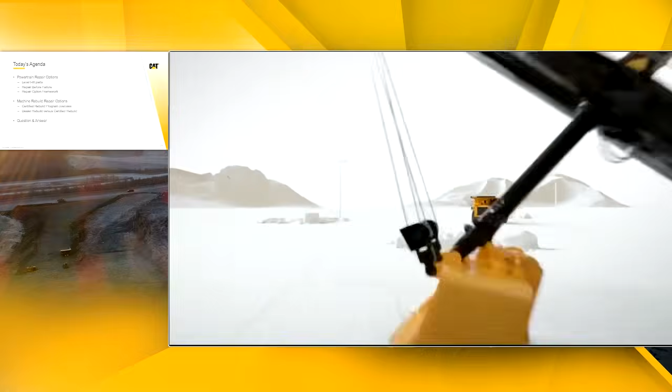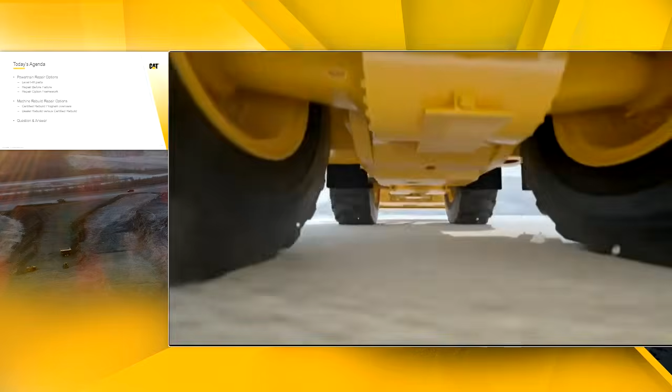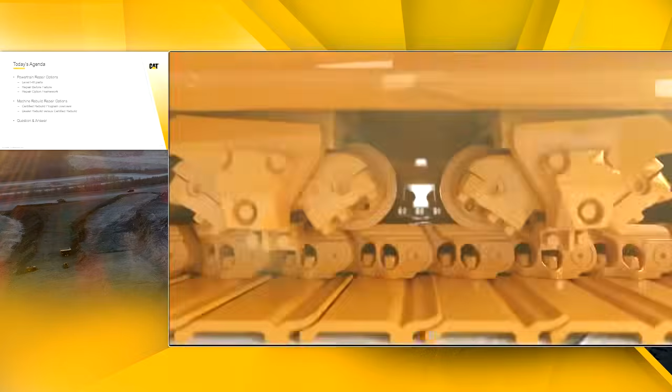You choose Cat equipment to get the best for your operation. That's why it's critical to protect that investment by performing the needed repairs on schedule and before failure. Whether critical components like engine, drivetrain, and hydraulics, or a full machine rebuild, you can count on Caterpillar for the lowest total cost and the quickest turnaround time, maximizing uptime. After all, who better to trust for repairs than the OEM that designed components specifically to be rebuilt? Your Cat dealer offers the broadest range of options tailored to your needs, from quick time to quote, to tiered price offerings, to quality and reliability. You get their expert advice for the best solution, whether minor repairs, dealer exchange, Cat reman, or new. Plus, check out upgrades and enhancements for added comfort, safety, and performance. So you get tiered options, less downtime, and superior components for your machine's second life. That's sustainability, and it all starts with your Cat dealer. Ask about custom repair options and rebuilds today.

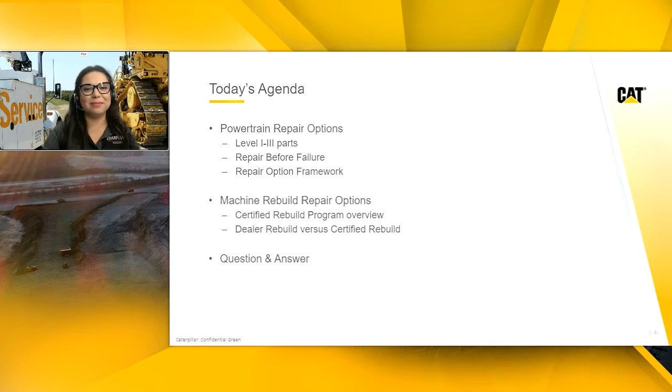I will turn things over to Lina now to give us an introduction to powertrain repair options. Lina, how are you today?

Hi, thank you so much. Good morning, everybody. Thank you for making the time today to attend this repair options for Cat mining machines session. My name is Lina Ahmed. I'm the RO SME for EAME and CIS region. I'm part of the global repair option team.

Let me stop you very quickly. Your audio is sounding just a little bit odd. Let's check that audio very quickly. Let's have you try one more time. Can you hear me clear now? No, I'm hearing some distortion on your end.

Distortion, just a little bit of distortion. How about we get you to maybe adjust your mic, turn it on and turn it back off for just a second. And while you're doing that, I'll go ahead and guide the audience over to a poll.

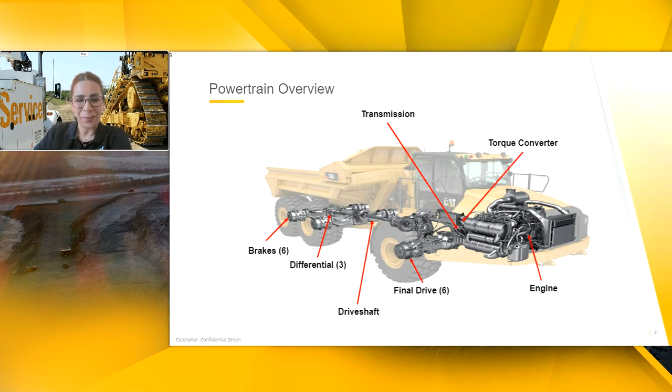Just want to remind you, if you have any question, just kindly throw it in the Q&A box. You can freely ask us and we'll take those after the session.

Give you a couple of minutes so you can complete the task. Thank you so much.

All right, let's go and find out the results. Repair before failure, I like that. That's a good indicator. So thank you for making the choices. Appreciate that.

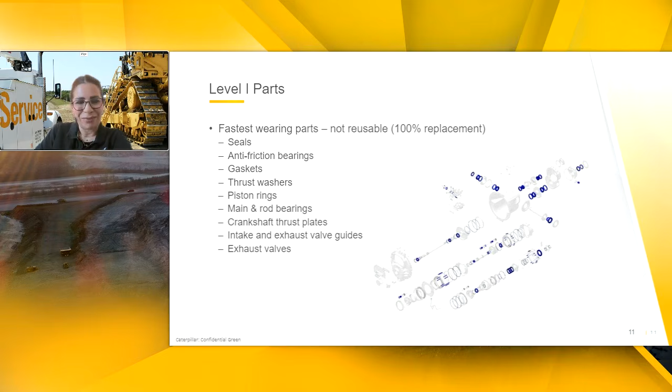Okay, level 2 parts. They are slower wearing parts designed with reusability in mind. We have all the reuse and salvage guidelines for those parts. Parts included are plates, discs, gears, and shaft.

So as we said, level 2 parts will be reusable if properly cared for during the first life. But if we don't care for them and extend the component life, they're allowed to fail, and then we cannot reuse some of the parts, and it will also affect the next level parts. Just a reminder, that's very important.

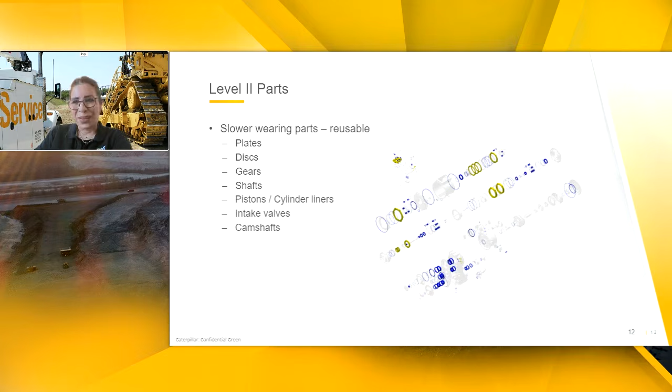Okay, take you to the level 3 parts. Level 3 parts are designed to last the life of the machine and only need to be replaced after catastrophic failure. So they are cases, housing, carriers, hubs, and main shafts.

Those level 3 parts are actually designed to last the machine, as I mentioned, and if there is proper maintenance and repair practice followed, they should typically never have to be replaced. So they are available most of the time at Caterpillar, but they are significantly higher on the cost side versus the level one parts.

So level 3 parts include the transmission cases, housing, and carriers that I mentioned. Also the final drive cases, hubs, shaft, and carriers.

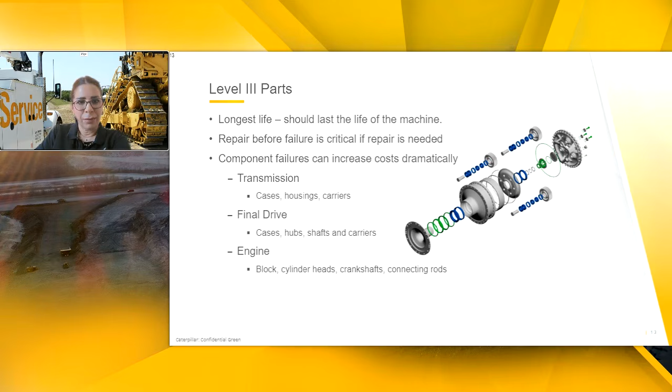Okay, why repair options? Very good question. We'll come to know now. What are the customers saying?

So we agreed, Caterpillar and Cat Dealer, and committed to meet customer service needs. That means offering customers the complete range of parts and repair options to capture the maximum value of their machine and component investment across the machine lifecycle.

So the repair option strategy is about working together to serve customers differently in order to meet customer needs. With that, we are looking for a broad range of options. The customer is looking for that. Having multiple repair options will meet most customer needs.

Actually, a full range of repair options consists of a minimum of 3 offerings. One of those options should be less than 50% of new. That's the customer expectation.

Second, the expert advice. Customers have many sources of information to reference from. Most customers also have relationships with other credible service and parts providers. But the best way our dealers differentiate from our competitors is being the experts on keeping Caterpillar equipment running.

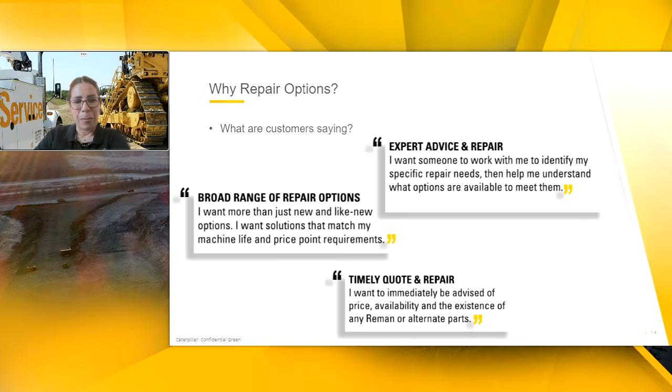Next slide, I'm talking about the repair option purchase drivers.

Those are the primary purchase drivers. As you can see here in this graph, we focus on those primary purchase drivers.

Why focus on these? They're used to develop an understanding of customer needs. Those purchase drivers relate to the investment and include many factors like ownership - for how long does the customer intend to keep or own the machine, and what is the expected residual value at the end of asset life. Utilization is another important element: number of hours, the work environment, and that also depends on the application and mindset.

The financial aspect is also very important, which represents the cash investment and the customer's expectation of price. That's why we mentioned we need multiple price points to serve our customers and their needs. The last very important option is the expected turnaround time - the customer's expectation to get the equipment back to service.

So understanding those purchase drivers helps the dealer's customer-facing staff offer the correct repair option to the customer. It's also important from the customer perspective - understanding those purchase drivers helps aid the dealer on which option best helps the customer's current situation.

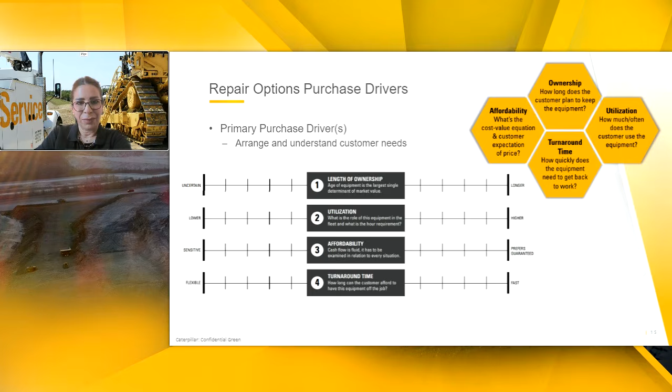That relates to the previous slide when I talked about the attributes and purchase drivers - which part of the repair options is best for each customer, not just by industry segment, but all the buying habits that the customer has as well. So what is a repair option definition?

In general, to simply define repair options, it's a part or service solution offered by a CAT dealer to a customer, including multiple options: new, reman, dealer exchange, repair or rebuild, as well as parts kits or general duty parts. This requires our dealers to consult with the customer well in advance to make the best selection across a broad range of options they can offer.

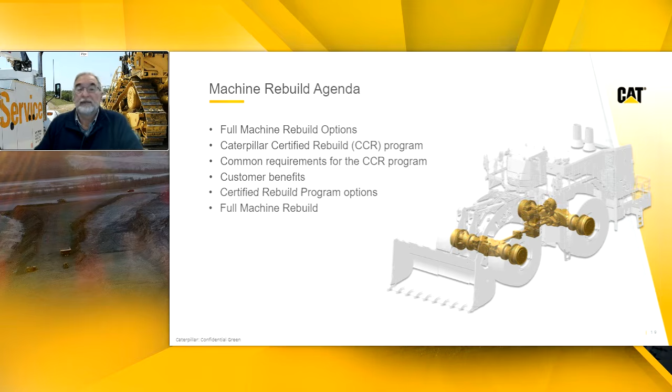So in two main categories, we have a dealer rebuild, where you and the dealer determine how you rebuild that machine, to what scope, what the budget is for that machine rebuild. Caterpillar don't get involved in that to a very large degree - the primary decision-making is between yourselves and the person doing the rebuild, hopefully the Caterpillar dealer.

Then you have the Caterpillar Certified Rebuild. That's when Caterpillar and the dealer determine what needs to be done. Caterpillar has a very big influence in this - we understand how the machines were manufactured in the first instance, and we understand what needs to be updated in those machines to make them go another life. That's what we have as our standard for a certified rebuild. There's no reason you and the dealer cannot go over and above that level, but we insist on a minimum level for that certified rebuild.

For doing that, we have a few other options. You can use Caterpillar Finance, you can use Caterpillar Insurance. So we can get extended warranties on these CAT certified rebuilds because we know what the condition is, we know what is being rebuilt, and so we can warrant those a lot better than we can if it's a standard dealer rebuild.

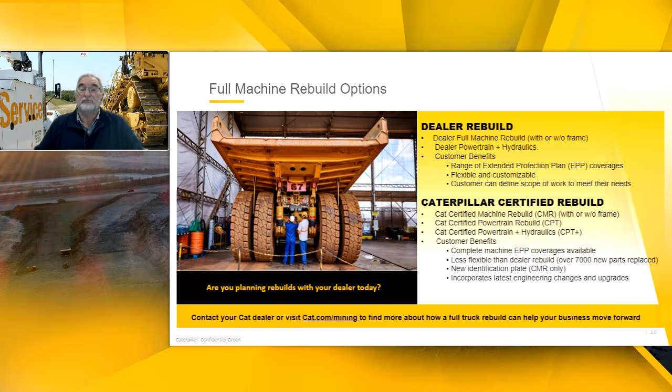So the purpose of the CCR program, the Caterpillar Certified Rebuild Program, is to demonstrate the second life that we build into all our machines. When you buy a Caterpillar machine, you're not just buying it for the life - maybe 20,000 hours for an engine, up to 80,000 to 100,000 hours for the machine. You can actually rebuild that machine and get a second life out of it, taking it out for a full second life if you do a certified rebuild. That's how Caterpillar demonstrates the value of the CAT product.

There are some must-use parts. The things that Lina went through before, the level 1 parts, must be replaced - there's no question, no negotiation, they must be replaced. When it comes to the level 2 parts, the things that may be reused, they can only be reused according to our specific reuse and salvage guidelines, which ensures they will last a second life. If there's any question they will not last the second life, they are replaced - with either a CAT new part, a salvage part from the dealership, or even a CAT reman part. So there's a number of options available.

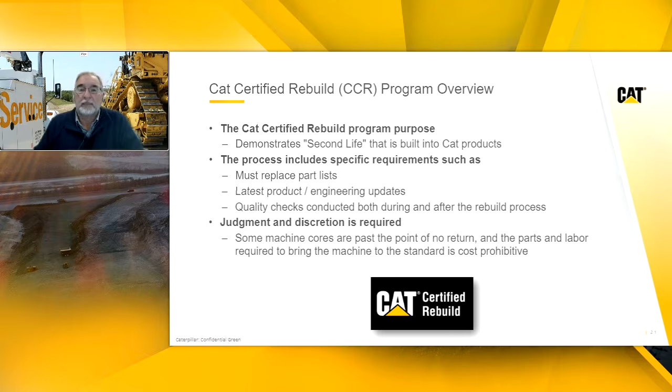Some of the things that must happen as part of the certified rebuild guarantee that you get the best possible rebuild available in the industry. First, it must be rebuilt by a Caterpillar dealer. So the CAT dealer must rebuild your machine, it cannot be done by a customer or a third party. Caterpillar dealers are the only ones that have the proprietary information and the proprietary scope that enables the machines to be rebuilt.

Only CAT parts can be used, so third party or will-fit parts are not allowed in a certified rebuild. That's to make sure that we get a full second life out of these components.

The dealer must perform the standard scope of work. Caterpillar dictates what the rebuild must look like, what the scope of work is, and that must be adhered to as part of the program to be certified as a certified Caterpillar product. Each of our dealers go through a process and must run by the Caterpillar scopes of work.

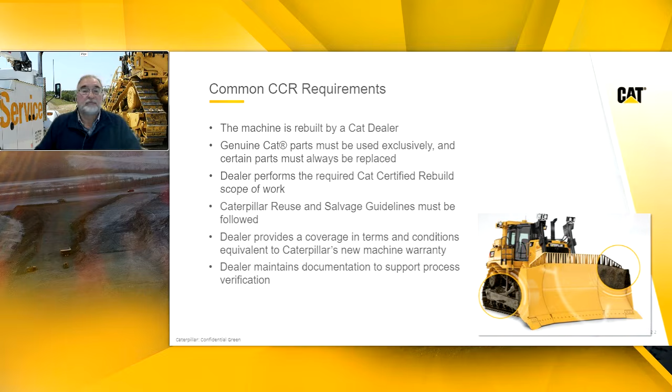One of the things that must also be done is Caterpillar dealers must provide you, the customer, a full warranty statement, and if there's extended warranties, EPPs we call them, through CAT insurance, that must be identified at the same time. So there's a number of things that must be done by the dealer to enable you to get the full value of the certified rebuild.

These are just some of the benefits you get from having a certified rebuild over a machine rebuild or a dealer rebuild. You have your machine, or the economics of that machine, maximized. Like I said before, if you buy a new CAT machine, you don't just buy it for one life, you can rebuild that machine multiple times.

And that's where the economic value of that machine comes through. You get the latest technology. So if you have a fleet of machines all the same technology level and you put a new machine into that fleet, you will have trouble trying to match the fleet between those two models. One of the options you can do is rebuild the older machines in that fleet, and you continue with that same technology level, so there's no problem with changing technology.

Your mechanics, your workshop are familiar with that machine, your operators are too. They're all running at the same speeds, the same cycle times. So there's a lot of advantage in keeping that same model in your fleet if you've got a large fleet of machines. You will get all the updates, so if there were any updates done during the life of that model, they'll all be done when the machines are updated and rebuilt.

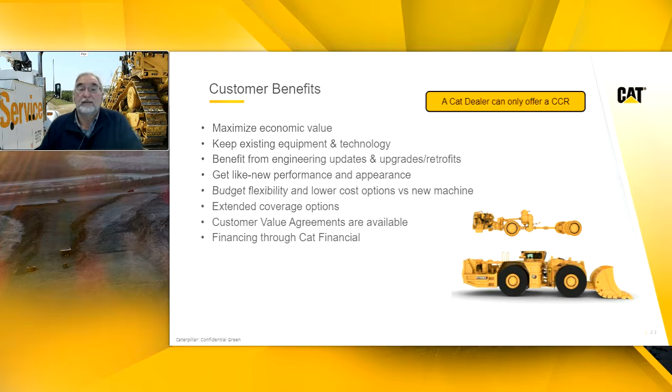This is a CMR, or the Certified Machine Rebuild, the top level machine rebuild in the Certified Rebuild program. If you go into the CMR option, you'll receive a machine that is as good as the new machine that comes off the assembly line at Caterpillar.

This is where the machine is totally broken down. It is pulled apart. Every component is changed out. All the wiring harnesses are changed. Everything is renewed, serviced, repaired, or replaced. So what comes out of the dealer facility is a machine that is as good as the new product coming off the CAT assembly line.

So if you're after a new machine that meets the criteria we were talking about before, as in keeping the current technology, this is a product that is very much an option for you in that area.

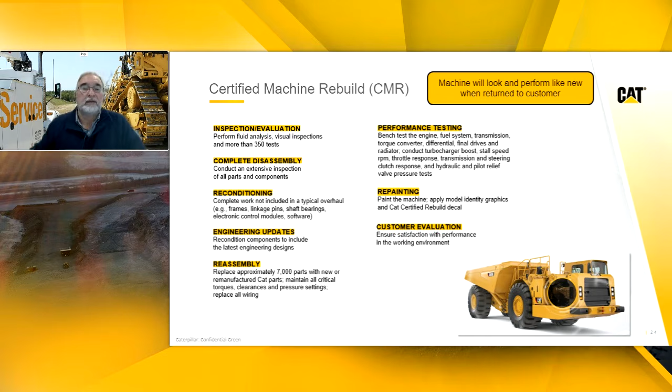The next one down from there is what we call a certified powertrain, or a CPT. We talked about this as being the radiator to the wheel nuts. So anything that's involved in the motive power of that machine is touched, is renewed, and is given at least a second life. This is a good option for a lot of customers, where they don't want to spend a lot of money on the body or the chassis of the machine that's in very good condition. Maybe the cab is in okay condition, and they don't want to spend a lot of money. This is the better option, because at least here you will know that all of the powertrain, so the radiator, the engine, torque converters, transmissions, diffs, are all in very good condition.

As I said, this is a very good compromise in the certified rebuild. We, as Caterpillar, give the full scope of the works of this product, and so it is controlled by Caterpillar and conducted by the dealer. Caterpillar gives the dealer the scope for each of the models, and the dealer conducts the rebuilds. So it doesn't matter whether that dealer is in South Africa or in Europe or Australia or North America. If they're doing a CPT on a model, you should expect that same quality and the same scope of works from all of those dealers, because it's centralized with Caterpillar.

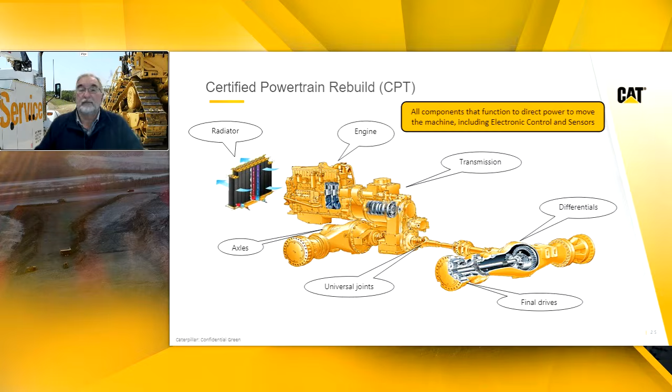This is a slight variation to the CPT, called the CPT plus H. This is where we do a CPT, which is the complete drivetrain and powertrain rebuild. Again, from the radiator to the wheel nuts, plus it also includes the hydraulics. So if you've got a machine, a wheel loader or a tractor that is very hydraulically orientated, this could be an option for you as well. It's all of the powertrain, plus it includes the hydraulics as well.

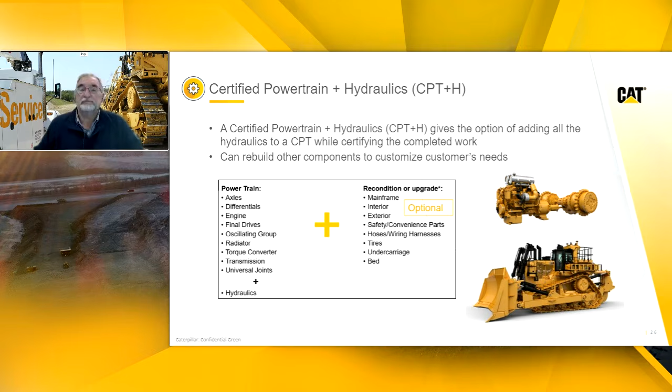Then we have one of the lower levels in the certified rebuild program: the certified machine component rebuilds. This is if you only want to change out a component. Let's say the engine has gotten to the end of its usable life, you can change that out. That's called the CMCR-E. It's a certified rebuild that only changes out the engine and the radiator, but it can also be financed through Cat Financial, and it can be insured through the CAT insurance program with what we call an EPP, or Equipment Protection Plan.

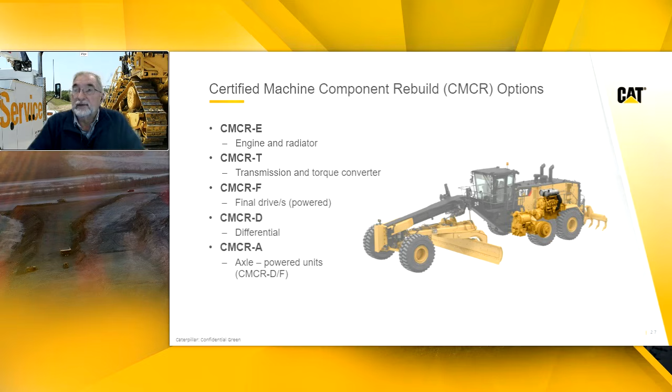You can see there's one for transmission and torque converters. There's one for final drives, only the powered final drives, so those that have a motive force. There's the differential. If you add the final drives and the differential, that's what we call the axle. So the axle is just the combined final drive and differential portion of the certified rebuild. There's also a new option coming through for hydraulic pumps. If you're interested in the hydraulic pumps, contact the CAT dealer and they'll have information on that for you as well.

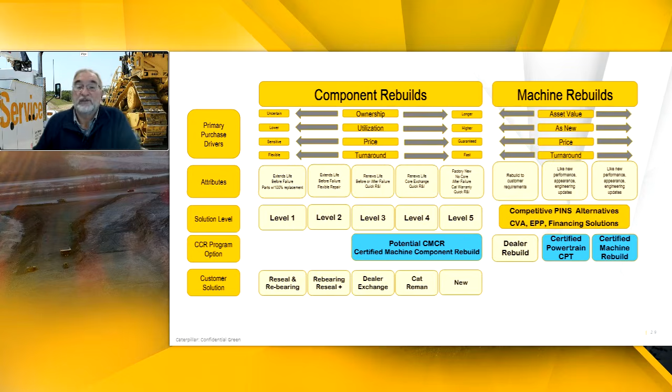So in summary, what we'd like to say is there are options. There's a broad range of repair options available to you through our CAT dealer network. All our CAT dealer technicians are Caterpillar trained. They are experts in the Caterpillar product. They are up to date with the Caterpillar product.

A lot of our third-party rebuilders claim they're Caterpillar trained, but they may not be up to date. So have a look at your CAT dealers, get a timely and accurate quote from those people, get the repair, work with your dealer, and make sure you get the best results possible. They're there to help you as a Caterpillar customer.

The other thing we'd like to say is there's a lot of packages that we can offer to the repair options area, whether that's the EPP or whether that's the financing package. The dealers have a lot of tools, both the internal dealer tools and also Caterpillar tools available to them for the options repair for you customers that we need there.

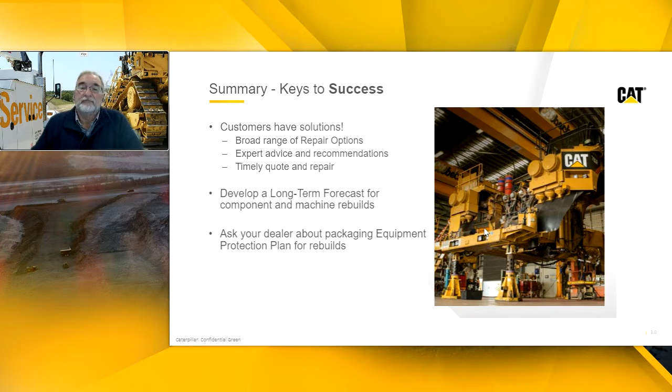Okay, I think that's probably about it. If anyone's got any more questions, please put them in the chat and we'll pass back to you, Ara.